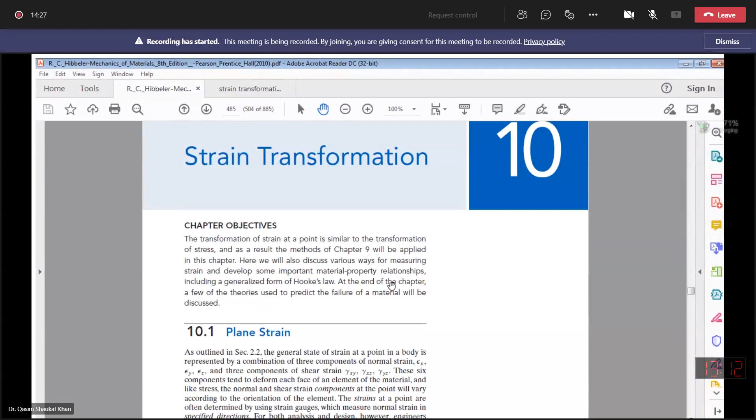Strain transformation is our chapter, chapter number 10 of R.C. Hibbeler 8th edition. Today we are first going to have the introduction about this chapter and what we are going to cover. Then in the second half of the lecture, we will derive the equations for the computation of normal strains, shear strains, similar to the stress transformation which we had done earlier.

So strain transformation, the transformation of strain at a point is similar to the transformation of stress, and as a result the methods which we have studied in chapter 9, which was stress transformation, will be applicable to this chapter. In the stress transformation chapter, if you recall, you first derived the equations to compute the transformed normal and shear stress.

Then we solved the numericals. Then we derived the equations for the computation of principal stresses, maximum in-plane shear stresses, orientation of the principal stresses, and orientation of the shear planes. Then in the second half we studied the Mohr circle.

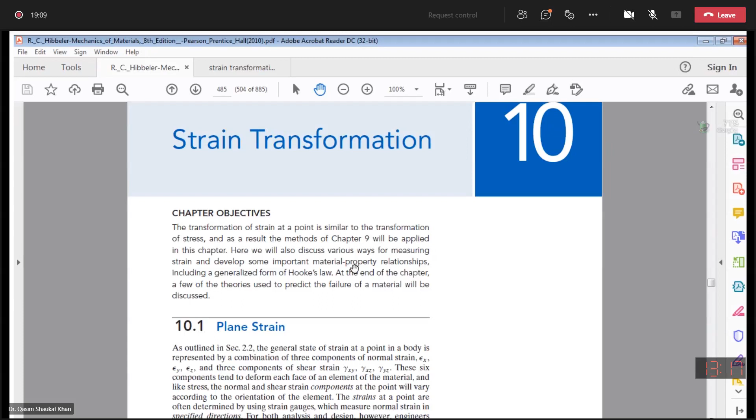So let's start first with plane strain. What is plane strain? First, the simple definition of strain itself - the general state of strain at a point is represented by a combination of three components of normal strain and three components of shear strain. If you recall, strain is change in length over the original length. Now, the next thing is we have studied that there are two states.

One is the triaxial stress state, the other was biaxial stress state. In triaxial stress state, or general stress state, you had the normal stresses sigma x, sigma y, and sigma z, and you have the shear stresses tau xy, tau xz, and tau yz. Now these normal stresses will produce normal strains - sigma x will produce epsilon x, sigma y will produce epsilon y, sigma z will produce epsilon z, and the shear stresses will produce shear strain - tau xy will produce gamma xy, tau xz will produce gamma xz, tau yz will produce gamma yz. So now recall that in the triaxial or general stress state...

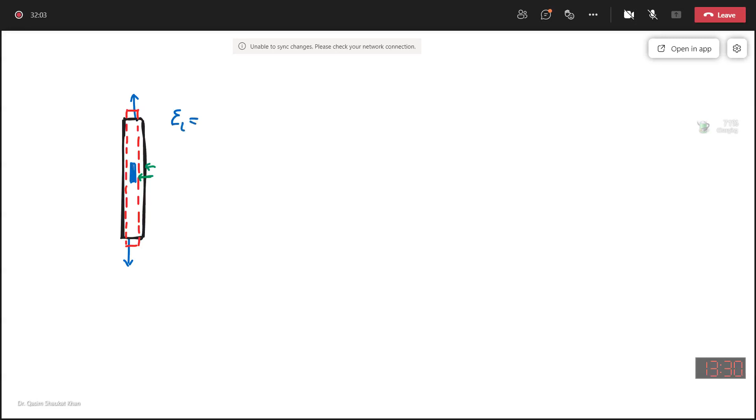So your longitudinal strain, let's say you have attached a strain gauge like this. This strain gauge attached in the longitudinal direction will measure the longitudinal strain. Otherwise, you know that strain will be either from the strain gauge, or you can say change in length delta L over the original length.

Change in length over the original length, you can calculate the longitudinal strain. But if you have attached the strain gauge along the longitudinal direction, it will give you the longitudinal strain.

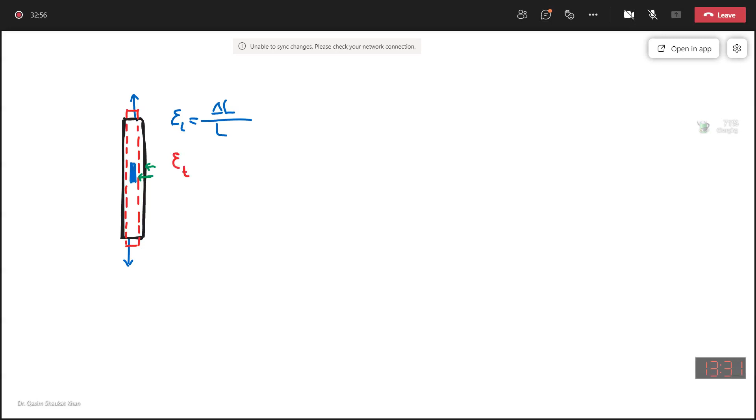Now the lateral strains, which are in opposite direction to the longitudinal strains, transverse strains or lateral strains, which are opposite in direction to your longitudinal strains, this strain gauge will not measure them, because this strain gauge is attached in longitudinal direction, it will only measure longitudinal strain. So transverse strain I will calculate using the Poisson's ratio.

So transverse strains, which are the strains perpendicular to the longitudinal direction, will be opposite in sign or opposite in direction to the longitudinal strain. So this is the negative sign to show the opposite direction.

This is not V, actually this is mu, this is your Poisson's ratio. Poisson's ratio for steel is 0.3. Longitudinal strain is this one which you have measured with the strain gauge. So you can compute the transverse strain in this way, not measure, you will compute it.

Poisson's ratio is a material property, and its value will vary for different elements. For steel, it is 0.3. For concrete, it varies from 0.15 to 0.2. For FRPs, the value is close to 0.2. So different materials have different Poisson's ratio values.

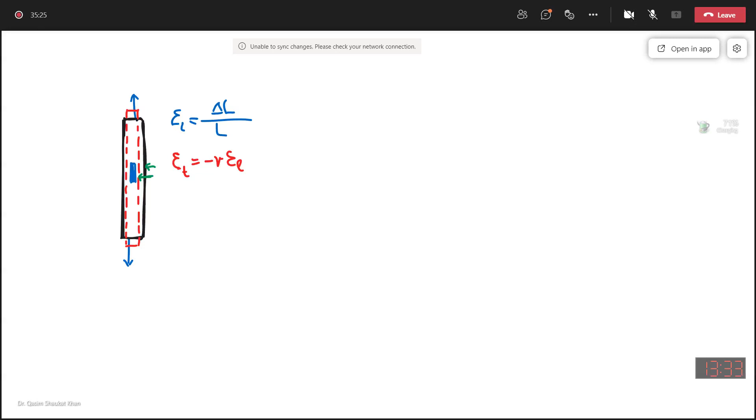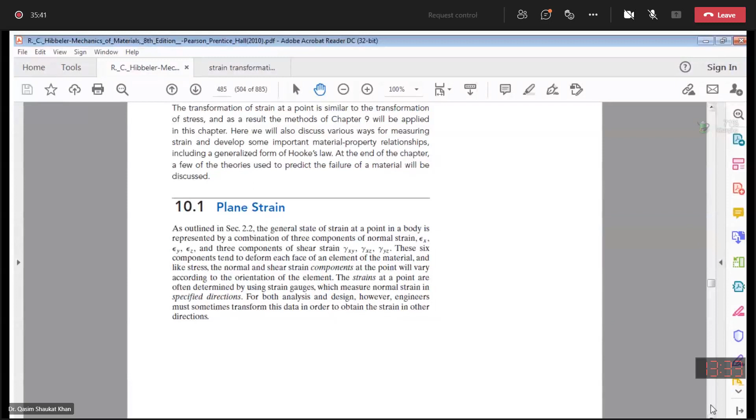There are two stresses because in case of the plane state of stress, we say that there is only sigma X and sigma Y. Now in the plane strain, as I told you earlier, there should be only epsilon X and epsilon Y. There should not be epsilon Z because there is no stress applied in the Z direction.

So see what happens: sigma X will produce the normal strain epsilon X. But due to Poisson's effect, there will be lateral strain in Y and Z directions due to this longitudinal stress in X direction producing longitudinal strain epsilon X. So a lateral strain in Y direction and Z direction will be produced.

Similarly, sigma Y, a normal stress acting along the Y direction, will produce a normal strain epsilon Y. Now, due to the Poisson's effect, this normal strain epsilon Y will produce a component in X direction and a component in Z direction.

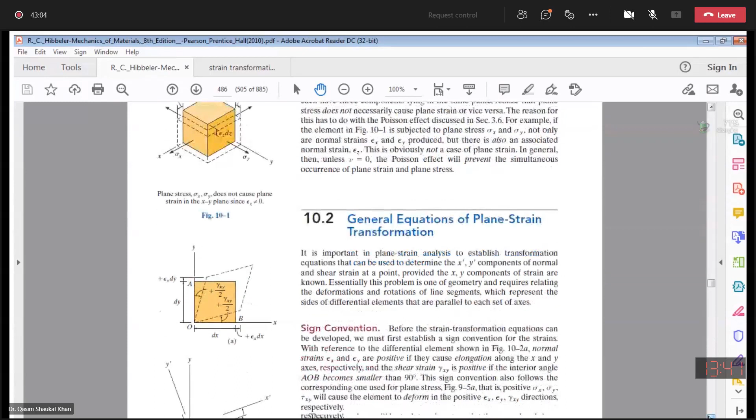General equations of plane strain transformation. It is important in plane strain analysis to establish the transform equations that can be used to determine the x dash, y dash components of normal and shear strain at a point, provided the xy components of strain are known. Of course, if you are given a plane strain scenario in which epsilon x, epsilon y, and gamma xy are given, you can calculate the transformed normal strains epsilon x dash, epsilon y dash, and gamma x dash y dash as a function of theta.

So essentially this problem is one of geometry and requires relating the deformations and rotations of the line segments which represent the sides of differential elements that are parallel to each set of axes.

Now the sign convention. In the stress transformation, we have said that tensile stresses are considered positive, as tensile stresses will produce tensile strains, and tensile strains will result in the elongation of the element. So, before the strain transformation equations can be developed, we first establish a sign convention for the strains. With reference to the differential element shown in figure 10-2a, normal strains epsilon x and epsilon y are considered positive if they cause elongation along the x and y axis respectively.

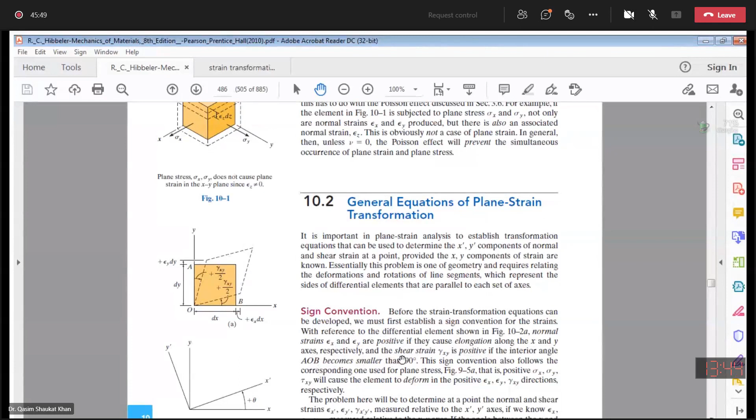Epsilon x and epsilon y are positive if they cause elongation along the x and y axis respectively. And the shear strain is positive if the interior angle AOB becomes smaller than 90 degrees. That I will explain to you now.

So this is our element, solid element AOB with the original dimension dx and dy. This dotted line, these are the distorted shape of the element after the tensile stresses acted on the element. So due to the tensile stresses, you have elongation.

You have elongation along the x direction. We know that strain is change in length over the original length. Now strain is epsilon x, original length is dx, so change in length is epsilon x times dx.

Now the strain in the y direction has resulted in change in length in the y direction. So change in length is strain times the original length. Strain is epsilon y, original length is dy, so change in length is epsilon y times dy. So this is your change in length in the y direction. You can see there is an increase in the length of the element along the y axis and along the x axis.

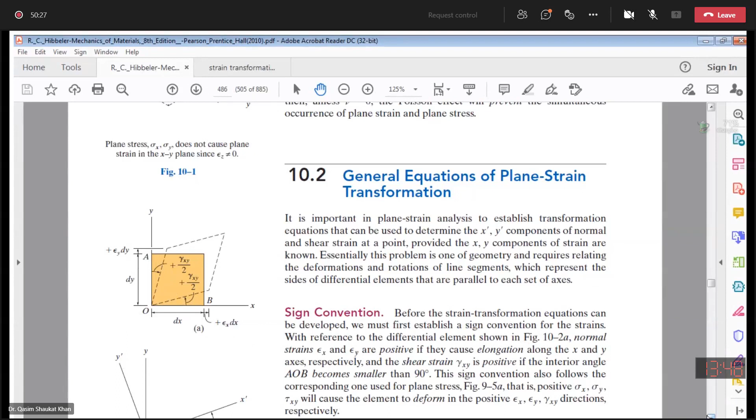So the sign convention also follows the corresponding one used for the plane stress. One thing more before proceeding further, the sign convention for theta. Earlier we said that if we curl the fingers of the right hand moving from x to x dash direction, then your thumb will point - if it points out of the plane, that is theta counterclockwise, it is considered positive.

And while curling the fingers, if x dash axis is downwards, moving from x to x dash direction, your thumb will point into the plane. When the thumb points into the plane, it is considered clockwise, and clockwise is considered negative. So the sign convention for theta is the same, and for the normal and shear strain it is based on the normal and shear stress sign convention.

So now one more thing to be noted: sigma x will produce epsilon x only because Poisson's effect is 0. Sigma y will produce epsilon y only because Poisson's effect is 0. Shear stress tau xy will only produce gamma xy.

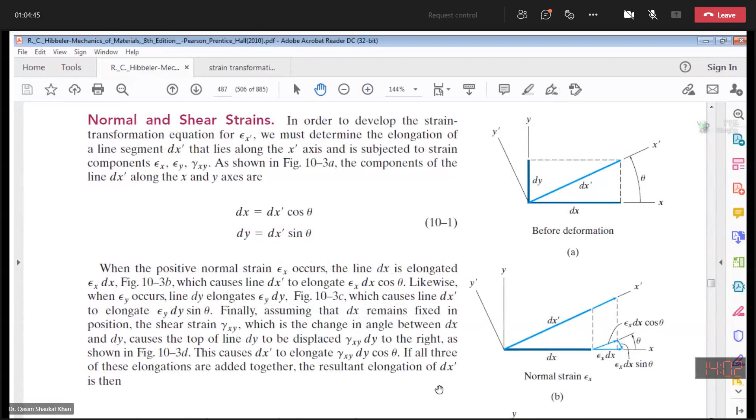Bismillahirrahmanirrahim, let's start the derivation. So, normal and shear strains. Now, first of all, try to understand the figures. So, this is your element.

Its dimension about the x-axis is dx, its dimension about the y-axis is dy. So this is dx, this is dy. Along the x-axis you have dx, along the y-axis you have dy. Now your element has rotated by an angle theta. So this is now your new position of x dash axis, and this is your new position of y dash axis. This is your dx dash, the length of the element about the x dash axis.

So in order to develop the strain transformation equation for epsilon x dash, we are going to derive the equation. So we must determine the elongation of the line segment dx dash, which is along the x dash axis, and is subjected to the strain components epsilon x, epsilon y, and gamma xy.

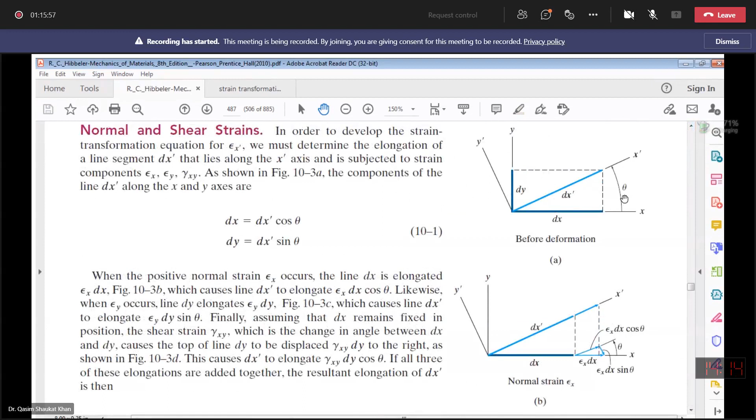Next is the influence of gamma xy. As said earlier, shear strain is the change in angle AOB. Shear strain is the change in the angle: if the angle AOB becomes smaller than 90 degrees, the shear strain is positive; if the angle AOB becomes greater than 90 degrees, the shear strain is negative.

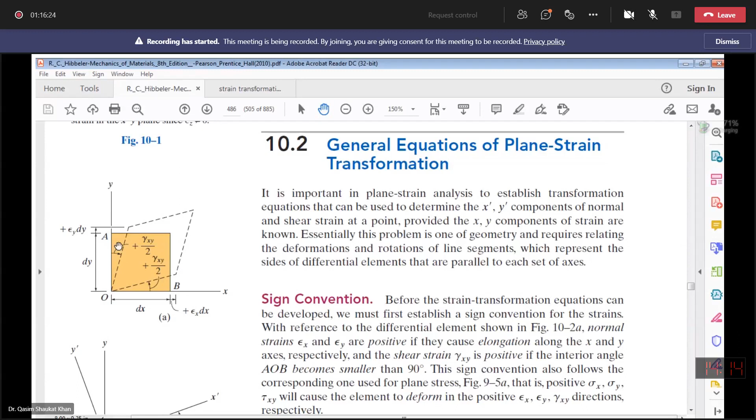Now let's see the influence of gamma xy. This figure, this one, this is dy, this is dx.

We have said that the shear strain is change in the angle. So over here, what we have done is fixed this length dx, meaning the angle of dx will not change. However, upon application of the shear strain, this dy has moved.

The dy has moved to this new point. Now this change in length from this point to this point is gamma xy, the shear strain, times the original length dy. So change in length is gamma xy dy.

Now if we want to find the components of gamma xy dy about the x dash axis, that is gamma xy dy cos theta, and it is pointing towards positive x-axis, so it is positive. This gamma xy dy vertical component about the y dash axis is gamma xy dy sin theta, and it is pointing towards negative y dash axis, so it is negative gamma xy dy sin theta.

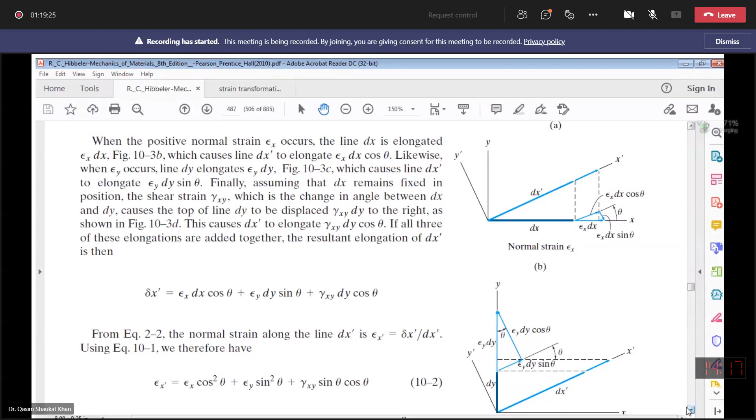Finally, assuming for the shear strain, assuming that dx remains fixed in position, the shear strain gamma xy, which is the change in angle between dx and dy, causes the top of the line dy to be displaced.

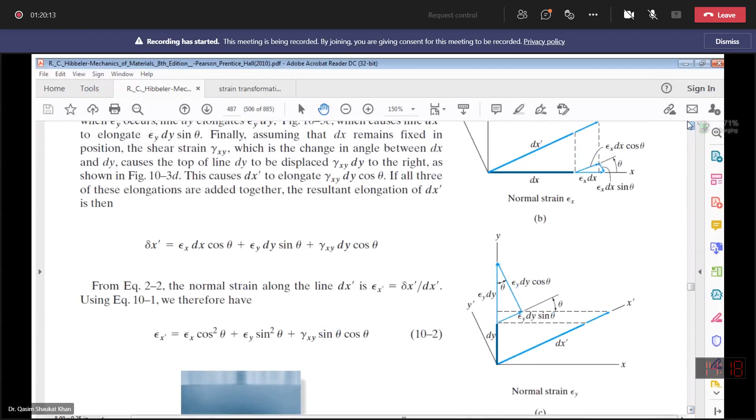So this is dx, this is dy, this is the new position of dy, and this is the change in length gamma xy dy. Its component about the x dash axis is gamma xy dy cos theta. So this causes dx dash to elongate by gamma xy dy cos theta.

If we add all these three elongations together, the resultant elongation of the line dx dash is obtained.

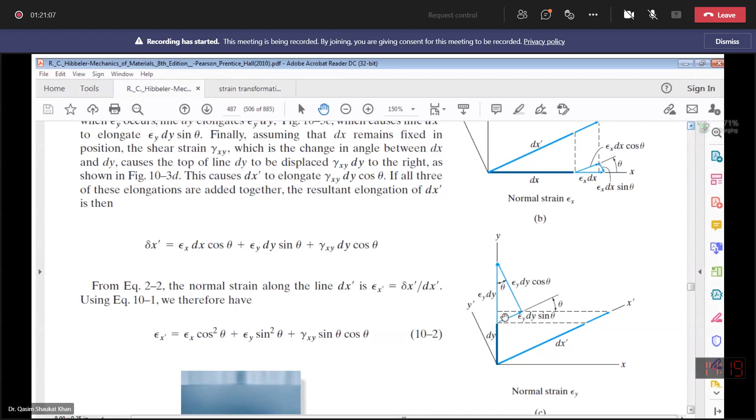Now, what is the change in length or increase in length represented by delta x dash? Due to the strain epsilon x, the increase in length about the x dash axis is epsilon x dx cos theta. Due to the normal strain epsilon y, the increase in length about the x dash axis is epsilon y dy sin theta. And due to the shear strain gamma xy, the increase in length about the x dash axis is gamma xy dy cos theta.

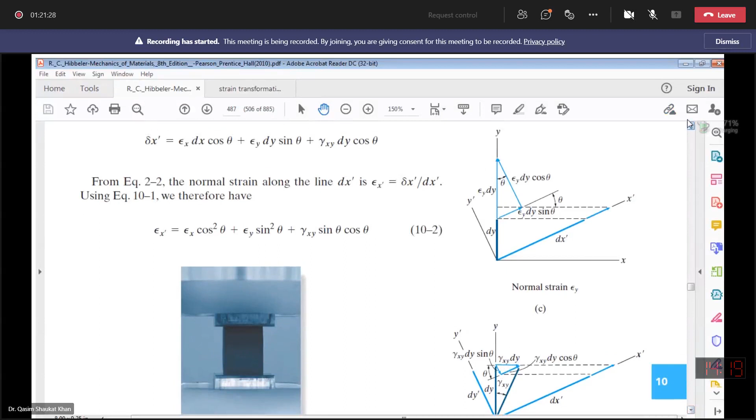So delta x dash, the elongation of the line dx dash, is equal to epsilon x dx cos theta plus epsilon y dy sin theta plus gamma xy dy cos theta. If you have any questions, please let me know.

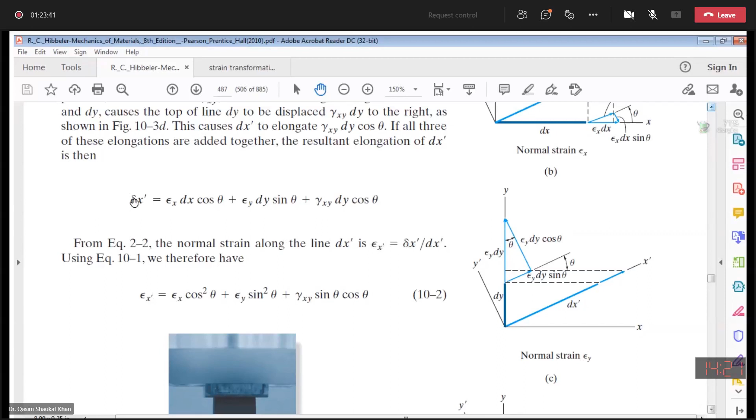So now in this equation, because we want to find the expression for epsilon x dash, we will put the value of delta x dash and divide it by dx dash. Along with that, dx is dx dash cos theta and dy is dx dash sin theta. You have to put these values of dx and dy in the equation as well.

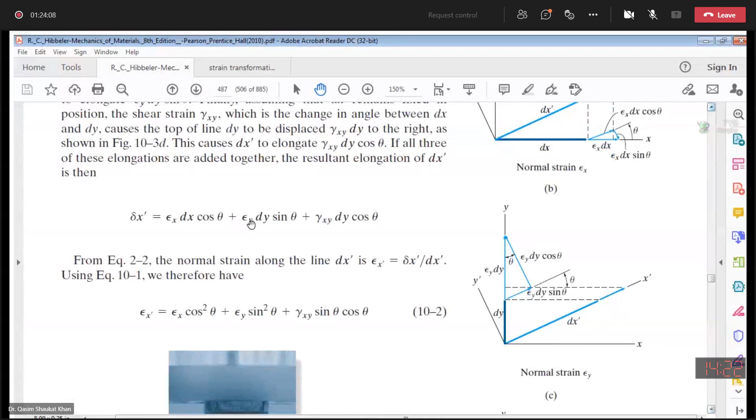Here dx and dy their values will be coming from here. Dx is dx dash cos theta, dy is equal to dx dash sin theta. So after simplification you will get this expression, epsilon x dash is equal to epsilon x cos square theta plus epsilon y sin square theta plus gamma xy sin theta cos theta.

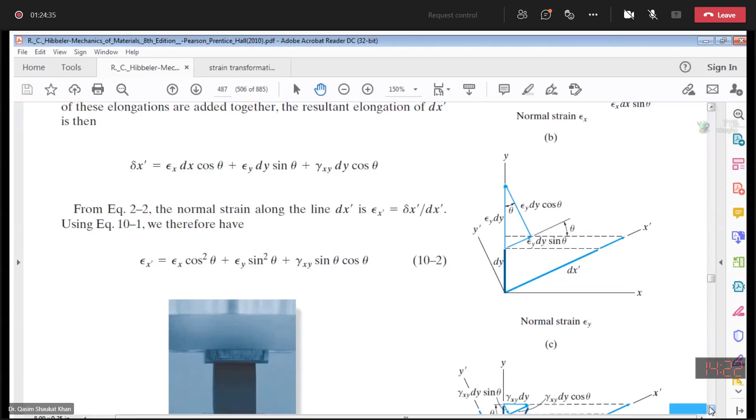Now in this equation you will put the trigonometric identities. Sin 2 theta is equal to 2 sin theta cos theta, cos square theta is this one and sin square theta is this one. Sin square theta plus cos square theta is 1. So you will get this final expression.

Epsilon x dash is equal to epsilon x plus epsilon y over 2 plus epsilon x minus epsilon y over 2 cos 2 theta plus gamma xy over 2 sine 2 theta. So this is your finalized expression for the computation of epsilon x dash.

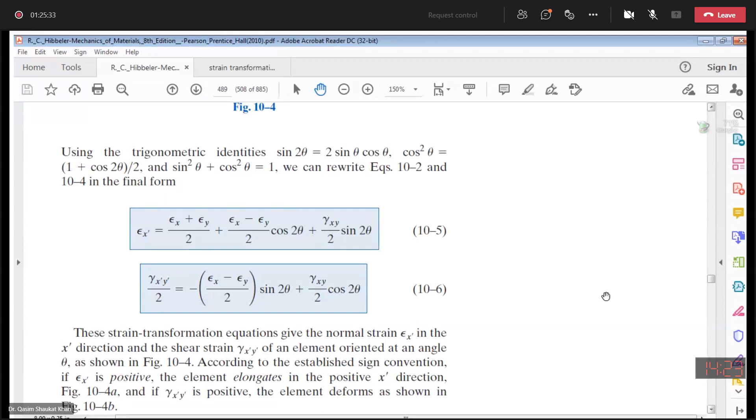Then to find the expression for epsilon y dash, we will simply use this equation 10(5). What we will do in this equation is replace theta with theta plus 90, theta plus 90, because x dash and y dash axis are oriented at 90 degrees apart.

So to get the expression for epsilon y dash, you will just put the value of theta in this equation as theta plus 90 and you will get the expression for epsilon y dash, that is equal to epsilon x plus epsilon y over 2 minus epsilon x minus epsilon y over 2 cos 2 theta minus gamma xy over 2 sine 2 theta.

Now next we are going to do the expression for the shear strain. I will quickly go through because you guys do not take any interest in the class, so there is no point in giving you very much detail. You should study yourself as well something.

So next is the strain transformation for gamma x dash y dash. Okay, so epsilon x dash we have it. Now the strain transformation equation for gamma x dash y dash can be developed by considering the amount of rotation each of the line segments dx dash and dy dash undergoes when subjected to the strain components epsilon x, epsilon y, and gamma xy.

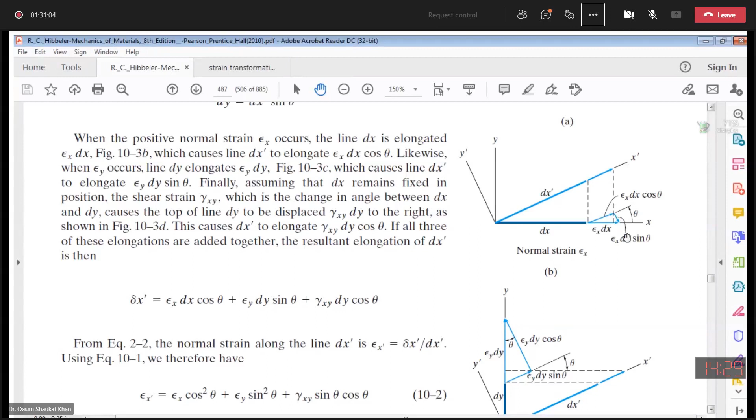This one, epsilon x dx, the deformation along the x-axis due to the strain epsilon x, has the component epsilon x dx sine theta. This epsilon x dx sine theta is the deformation along the y dash axis, perpendicular, and it is acting downwards, so it is negative: minus epsilon x dx sine theta.

Then, due to epsilon y, you have the deformation epsilon y dy cos theta, and it is pointing towards the positive y axis, so it is positive: positive epsilon y dy cos theta.

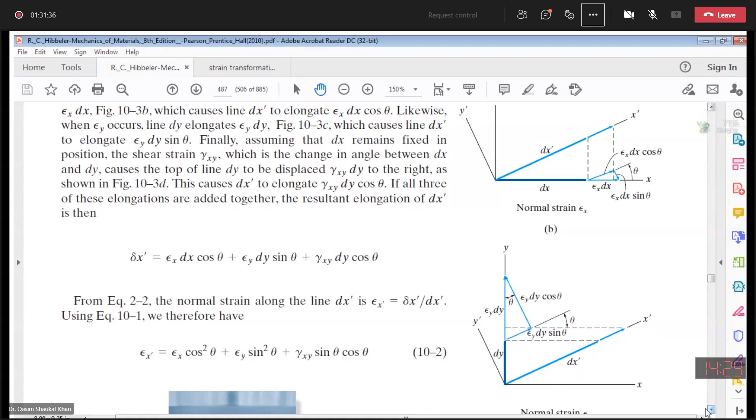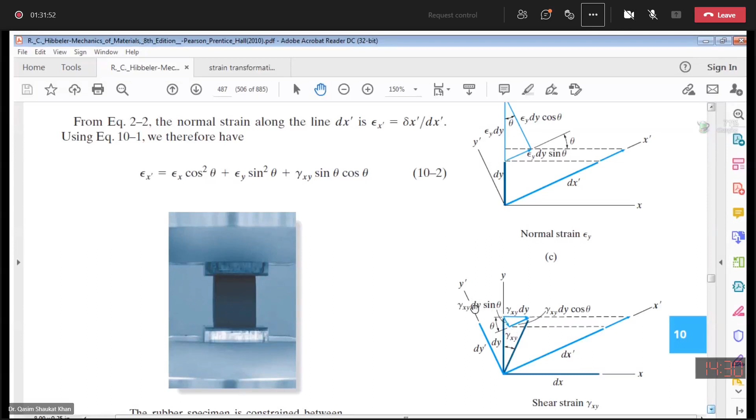Then the third one, due to the shear strain, is gamma xy dy sin theta, which is parallel to the y dash axis, and this is pointing downward. So this is negative gamma xy dy sin theta.

So to obtain delta y dash, consider the following three displacement components acting in the y dash direction: one from epsilon x, that is minus epsilon x dx sin theta; another from epsilon y, which gave us epsilon y dy cos theta; and the third one from shear strain, which gave us negative gamma xy dy sin theta.

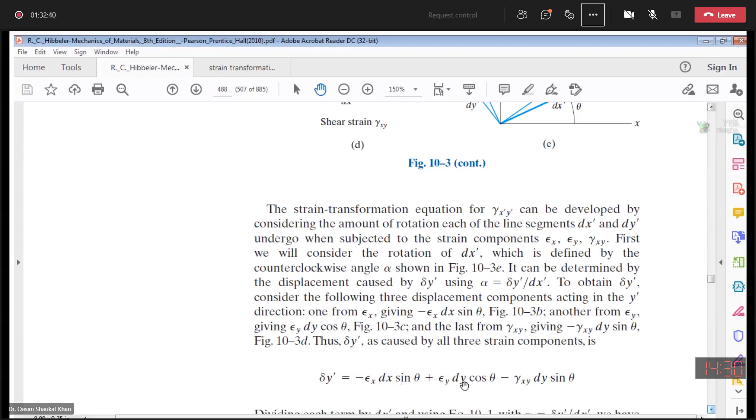Thus delta y dash is the sum of all three strain components, that is minus epsilon x dx sin theta plus epsilon y dy cos theta minus gamma xy dy sin theta. If you have any question, you can ask me now.

No question. So alpha is equal to delta y dash over dx dash. Delta y dash is minus epsilon x dx sin theta plus epsilon y dy cos theta minus gamma xy dy sin theta, divided by dx dash.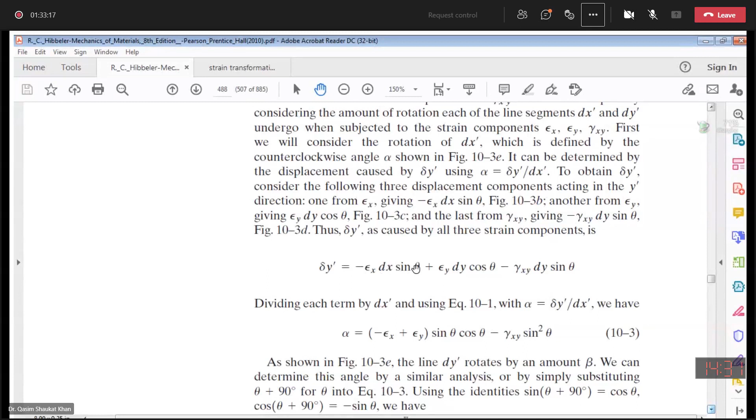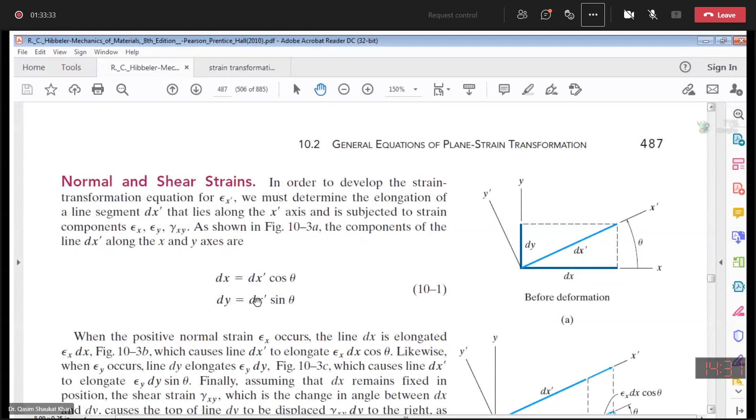In this, again, for dx and dy, you are going to put these values: dx is equal to dx dash cos theta, dy is equal to dx dash sin theta.

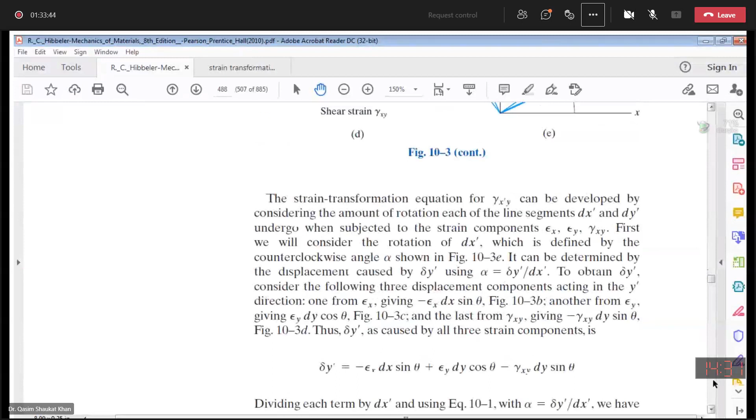So after simplification, alpha is equal to delta y dash over dx dash. After simplification, you will get alpha equal to minus epsilon x plus epsilon y times sine theta cos theta minus gamma xy sine square theta.

Now, as earlier in the figure, we have seen that dx dash has rotated by an angle alpha and dy dash is rotated by an angle beta. So alpha we have computed.

Now we need to compute beta. We know that the difference between these two will be 90 degrees. You can see, x dash and y dash, the difference between these two axes will be 90 degrees.

The line dy dash rotates by an amount beta. We can determine this angle by a similar analysis, or by simply substituting theta plus 90 for theta in equation 10-3. So in this equation, we can place theta plus 90 as a substitute for theta.

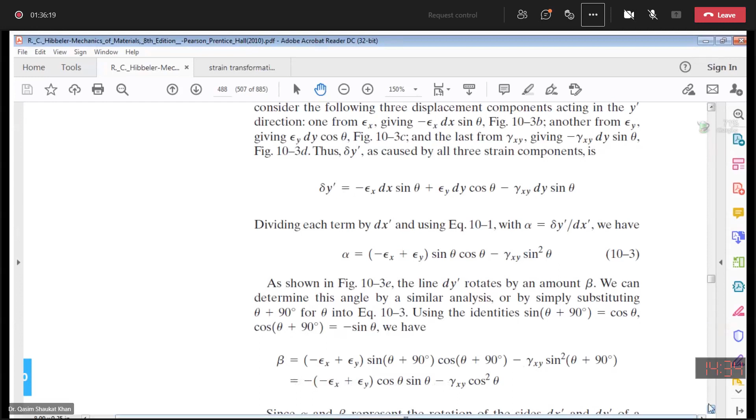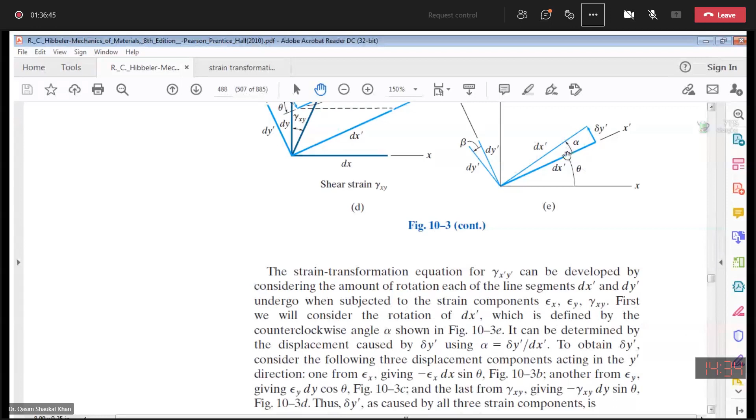So now we know that since alpha and beta represent the rotations of the sides dx dash and dy dash of the originally rotated element. You can see alpha represents the rotation of dx dash, and beta represents the rotation of dy dash.

Since alpha and beta represent the rotations of the sides dx dash and dy dash of a differential element, whose sides were originally oriented along the x dash and y dash axis, we know that shear strain is the reduction in the angle.

Reduction in the angle AOB. So the transformed shear strain will be alpha minus beta. This is the x dash axis, this is the y dash axis. So the difference in the angle alpha and beta will be your shear strain, the angle by which your element has distorted. So alpha minus beta.

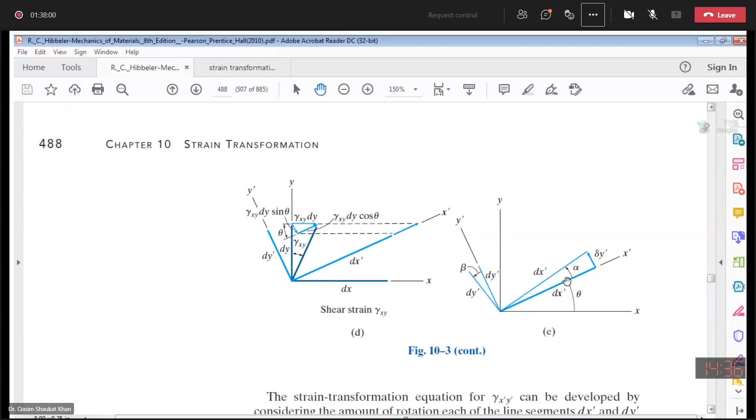This angle we have taken between the new position of dx dash and the earlier older position of dy dash as 90 degrees. So the difference between alpha and beta will be your transformed shear strain. So gamma x dash y dash is equal to alpha minus beta, and you have the value of

alpha as minus epsilon x plus epsilon y times sine theta cos theta minus gamma xy sine squared theta, whereas beta is equal to minus, that is, bracket minus epsilon x plus epsilon y cos theta sine theta minus gamma xy cos squared theta.

So your transformed shear strain is gamma x dash y dash equal to alpha minus beta. You will put the value of alpha and beta here, and then simplify to get these equations.

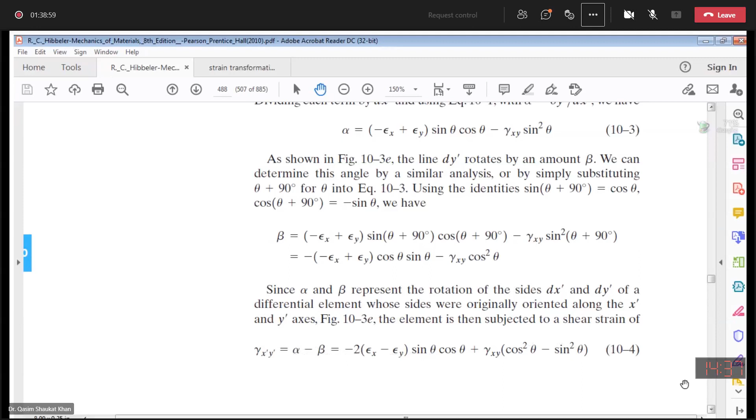Then at the end in that equation, you will put the trigonometric identities: sine 2 theta is equal to 2 sine theta cos theta, whereas cos square theta is 1 plus cos 2 theta over 2, and sine square theta plus cos square theta is 1.

So after simplification, you will get this equation, that is, gamma x dash y dash over 2 is equal to minus epsilon x minus epsilon y over 2 sine 2 theta plus gamma xy over 2 cos 2 theta.

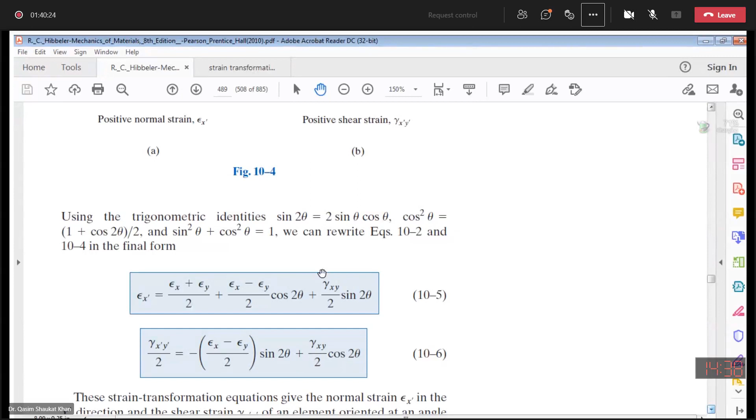Now if you see these equations, they are exactly similar to the stress transformation equations, where sigma x corresponds to epsilon x here, sigma y corresponds to epsilon y here, and shear stress tau xy corresponds to gamma xy over 2 here. When you simplify these equations, you will find there is a factor of 2, which basically means that shear stress tau xy corresponds to shear strain gamma xy over 2.

These strain transformation equations give the normal strain epsilon x dash in the x dash direction and the shear strain gamma x dash y dash of an element oriented at an angle theta. According to the established sign convention, epsilon x dash is positive if the element elongates in the positive x dash direction, and gamma x dash y dash is positive if the element deforms in a way that the angle is reduced.

This we have already done, that to get the epsilon y dash expression, we can simply replace theta with theta plus 90 in the epsilon x dash equation, and after simplification we get epsilon y dash is equal to epsilon x plus epsilon y over 2 minus epsilon x minus epsilon y over 2 cos 2 theta minus gamma xy over 2 sine 2 theta.

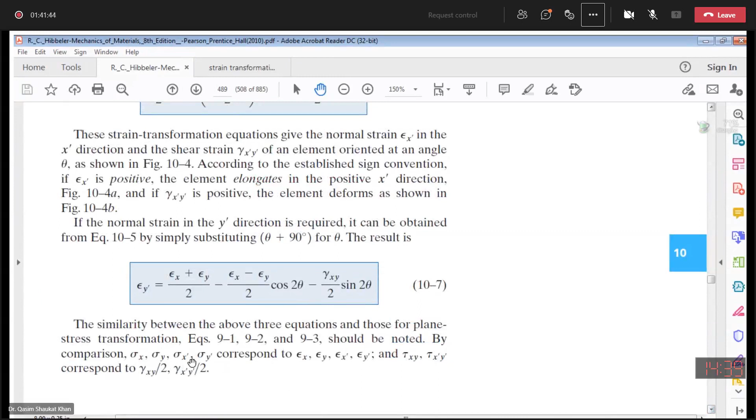So the next thing we have to study is the similarity between the above equations, which we have derived for the transformed normal and shear strains, with the plane stress equations.